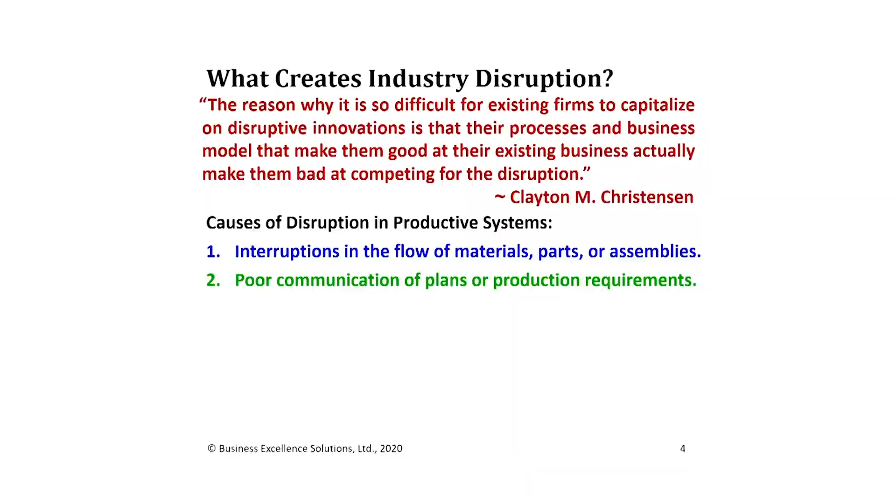So what are the causes of disruption in productive systems that we're looking at today? Well, first we have interruptions in the flow of materials, parts, or assemblies. And I'm sure you've all experienced those types of things. Next, we have poor communications of plans or production requirements. And I think also you probably have experienced that when you don't exactly know what the customer wants, or you don't exactly know what the materials are that you're processing. And then we start seeing there are issues in the production machinery or the system software, and it's not operating the way we think it should or giving us the results that we need to get. Then there might be shifts in customer demands or economic conditions that will have some external effect on us.

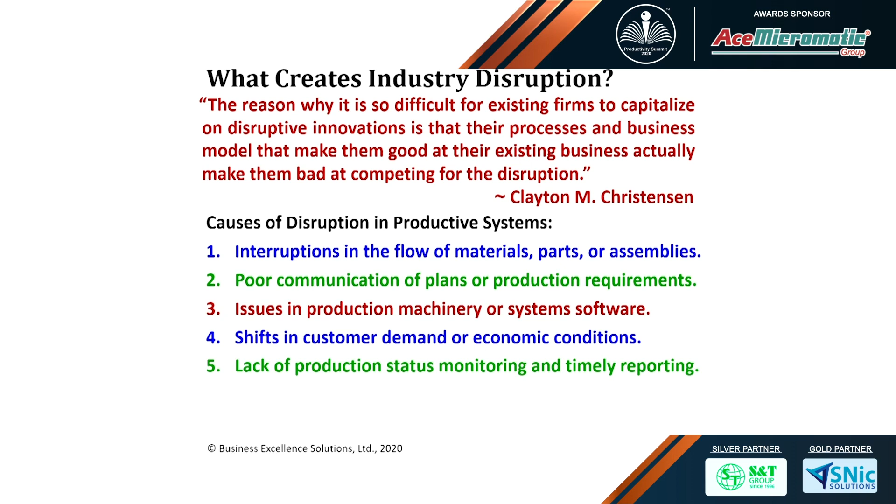Then the fifth is production status monitoring and timely reporting. We don't have it. We don't really know what's going on in the production system because we don't have that up-to-date inventory of what's happening. So we don't see the data flows. Another is there's an ineffective adaptation of the new technologies or systems. We know what we'd like to do, but we don't know how to actually implement it because we don't have the experience in using those tools, methods, or systems. And finally, there are some natural environmental occurrences or acts of nature that can create change in our systems. I live in Finland and we always worry about snow in the coming months. I know you don't worry about that in India, but maybe you worry about the cyclones.

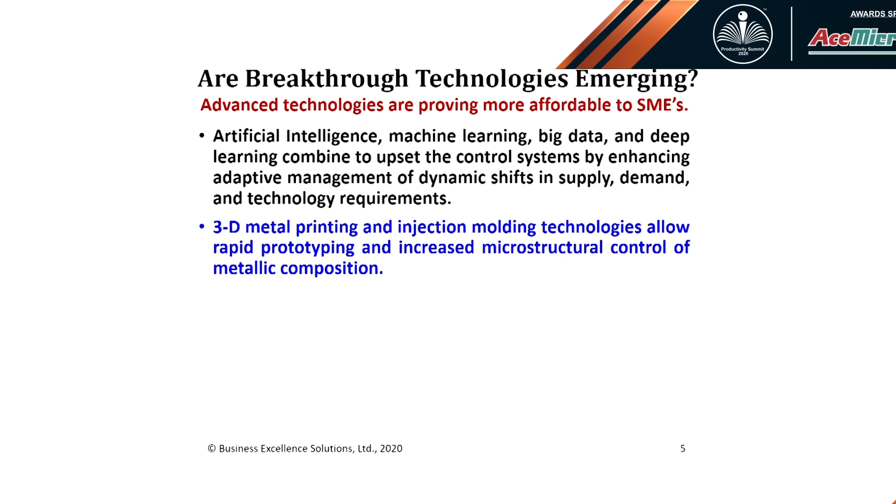So are breakthrough technologies emerging? So we see that there's some advanced technologies that are proving more affordable to SMEs. Now, we see artificial intelligence, machine learning, big data, deep learning. These combine to create control systems by enhancing adaptive management of dynamic shifts in supply, demand, and technology requirements. We see 3D metal printing and injection molding technologies allow rapid prototyping and increased microstructural control of metallic compositions.

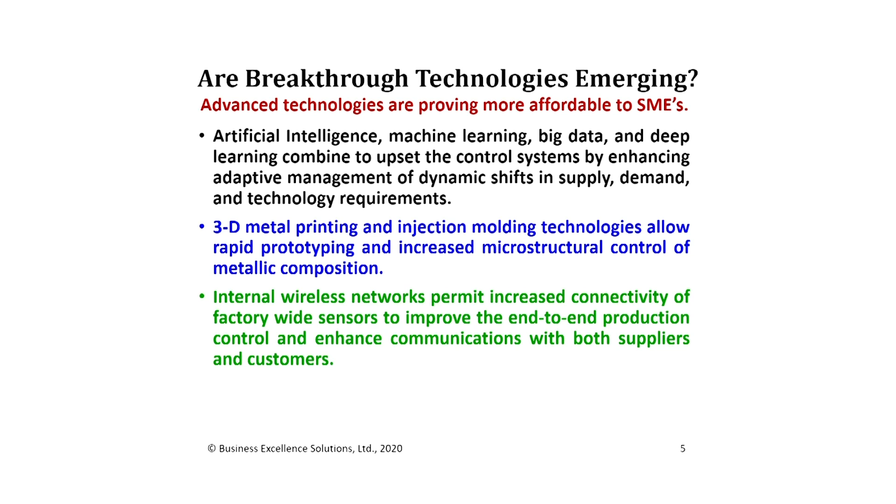We see internal wireless networks permitting increased technical connectivity and communication technology around factory-wide sensor systems to improve end-to-end production control and enhance communications with both suppliers and with customers. And then finally, we see digital sensors are becoming more accurate, inexpensive, and readily integrated into current production equipment. In the case studies that you'll see today, you'll see many of these technologies actually being brought to the field in terms of applications within Indian SME industries. So, which breakthrough technologies apply?

What can be done to control information and streamline flows? Well, we can make investments in information communication technology, what we call ICT. And this is using internet-based search engines and recommendation systems to increase our understanding of customer needs. It's also increasing the bandwidth and processing power of the digital communication links, which enhances our computer response for automated ordering systems or for tracking products as they're out in the logistics supply chain.

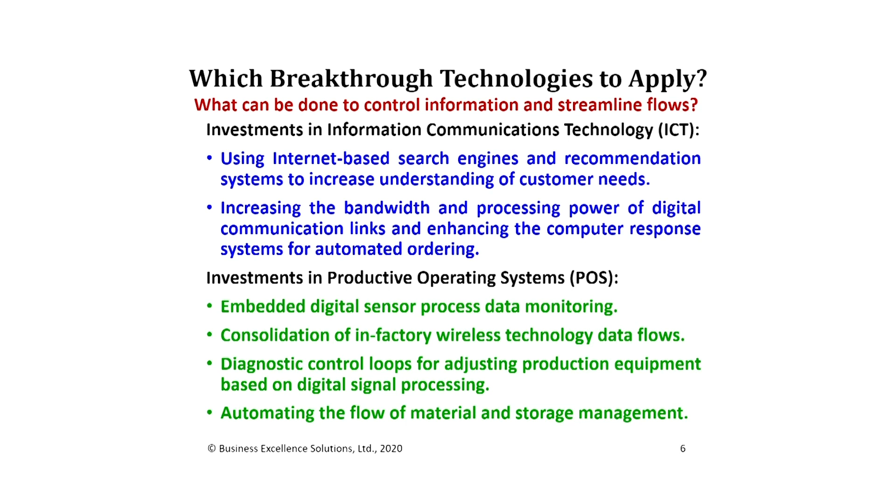We can also have investments in productive operating systems, POS. And so here we're talking about embedded sensors that are in process data monitoring. Or maybe we're consolidating factory wireless technology and data flows. Or we're doing diagnostic control loops to adjust production equipment based on digital signal processing. Or maybe we're automating the flow of material and storage management. So all of these are different things that are available to us to do today.

And we see technology paths for SME manufacturers. We should start small, think big, but begin with the end in mind. What is the design of the system we'd like to have? So begin by placing digital sensors to monitor production at critical control points.

So maybe we use RFID chips to determine location of critical components, or timestamps of barcodes to determine where items are as they advance through production, or motion detection to warn of unsafe situations, or vision systems that use pattern recognition to check on identification or completeness of work, or sensors that detect temperature, vibration, weight, etc. in terms of our items that are in the process of production.

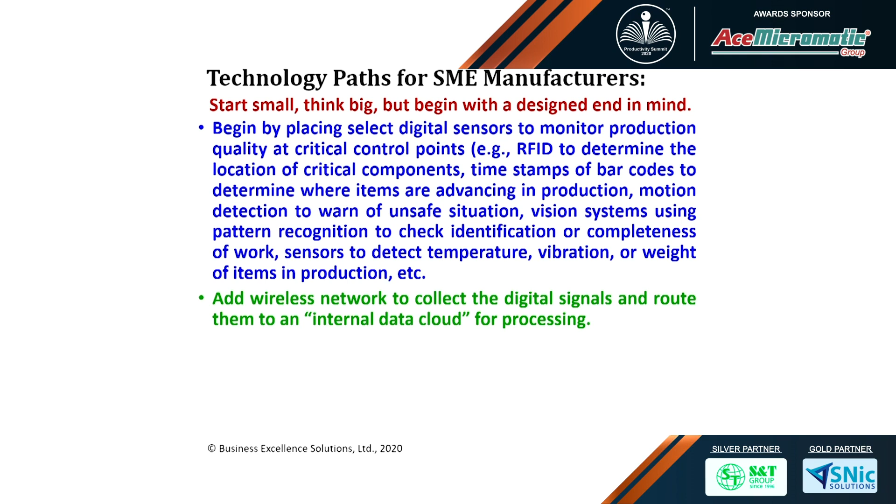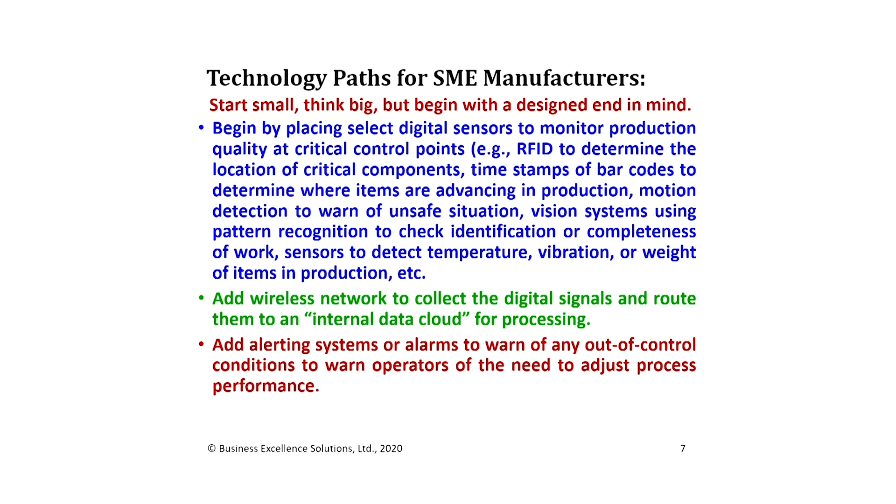We can add a wireless network to collect digital signals from around the production operations and route them to an internal data cloud for processing. We can add alerting systems or alarms that warn of out-of-control situations based on that data that's been collected, and tell the process operators that you have a situation that's out of control or that needs their attention.

Now, don't invest if you'll not be able to demonstrate the actual operational and financial benefits. I think this is a critical ingredient. Don't overinvest. Don't invest too early, because we don't have that much money in an SME to invest in these sorts of technologies.

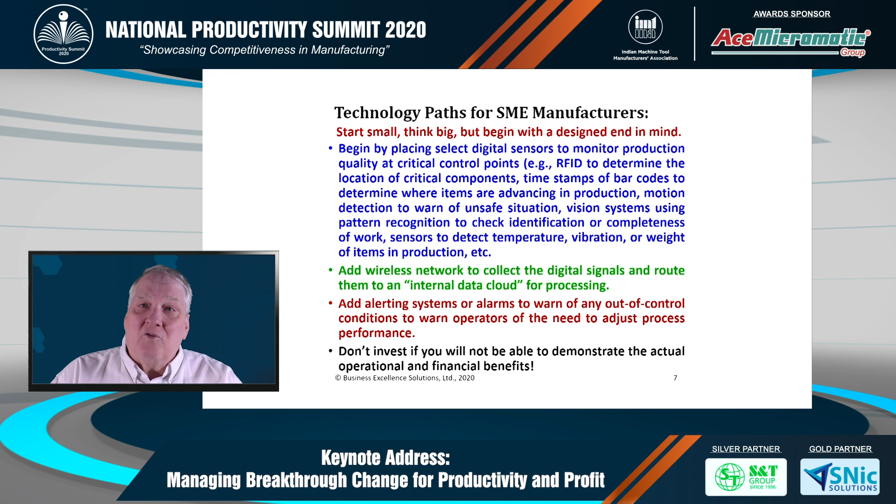Now, the good news is that we've gone through just this last pandemic, we have production now under control. Many times companies will find that they have excess production today. So investments do not need to be made in extending production capability. So we can use the money that we would normally use for production equipment in investing in the digital technologies to advance our control over those systems once we ramp up again after coming out of the COVID situation.

Now, I'd like to share with you a case study that illustrates how this can be done based on work that I did at Hewlett-Packard. And this was designing a lean technology system that had payback in less than 6 months. As a matter of fact, you'll see it was just 1 month. So the situation was we needed to perform injection molding of gears. And these were gears for very high, tight tolerance printing systems. And we needed to have 22 mold changes a day, 22 different molds.

And the current time at the start was 4 hours for a mold change, just a little bit less than that actually. And so we had a project team, one industrial engineer, that was myself. I had 2 recent graduates of engineering programs, a mechanical engineer and an electrical engineer. And then we also had Sal, the molding shop line leader. And we implemented this in less than 3 months.

And so we see the resource requirements. What does it take? Well, we were given an electronically automated controlled molding machine. It was just new at that point in time, a Nissei machine, and a budget of less than $100,000. And this was basically happening back in the 1985, 1986 timeframe. And the technologies applied, we had a blended approach.

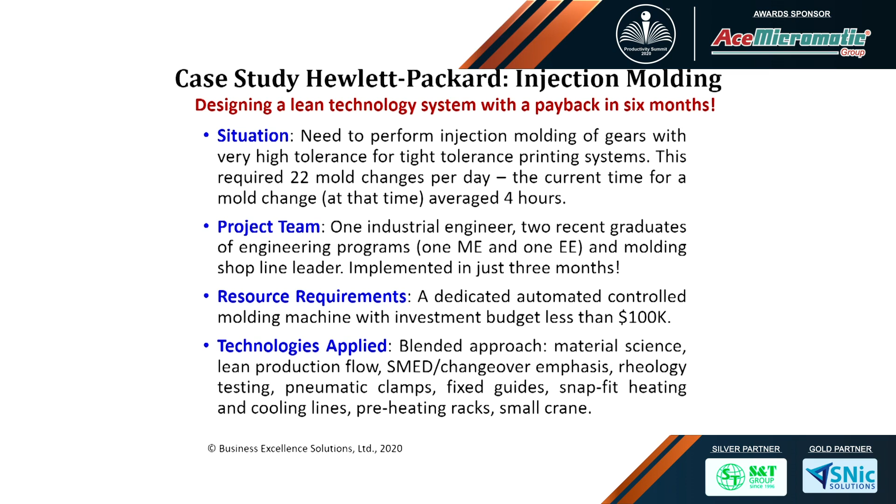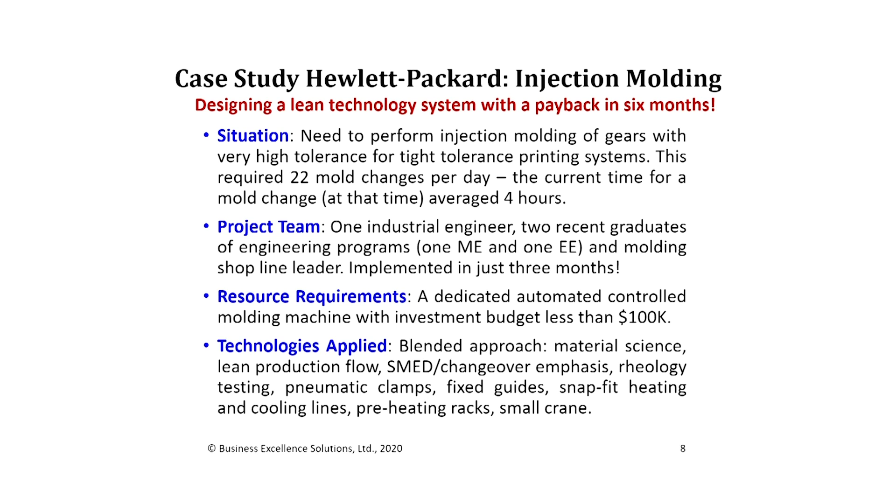So if you take a look at where do you start with lean, one of my senseis in Japan, Koichi Kimura, who's the head of the Factory Management Institute, he says start with setup time reduction. Don't start with 5S, don't start with anything. Setup time reduction, because that gets rid of waste in the flows. It allows the flows to move without having waiting time. It frees up productivity time.

So we took a blended approach. We were using material science in terms of how we were moving these parts. Previously, these parts were not injection molded. They were all made out of aluminum.

And so we were changing them to a polycarbonate with fiberglass and carbon filling. And so we were going to have an engineered plastic. We also had lean production flow. How do we make sure we get the flow of the materials, the parts, to the production line? Our rule was going to be mold today what we use tomorrow, so it would be dimensionally stable.

We used single minute exchange of die and changeover thinking to reduce the setup times. We had to test the rheology, or the shrink rate of the plastic, to make sure we understood what the shrink rate would be after it came out of the hot mold. We used pneumatic clamps to hold the molds in the molding machine. We had fixed guides that were put on the machine and on the tools so that they would just slide in place. We had snap fit heating and cooling lines so they would just snap on.

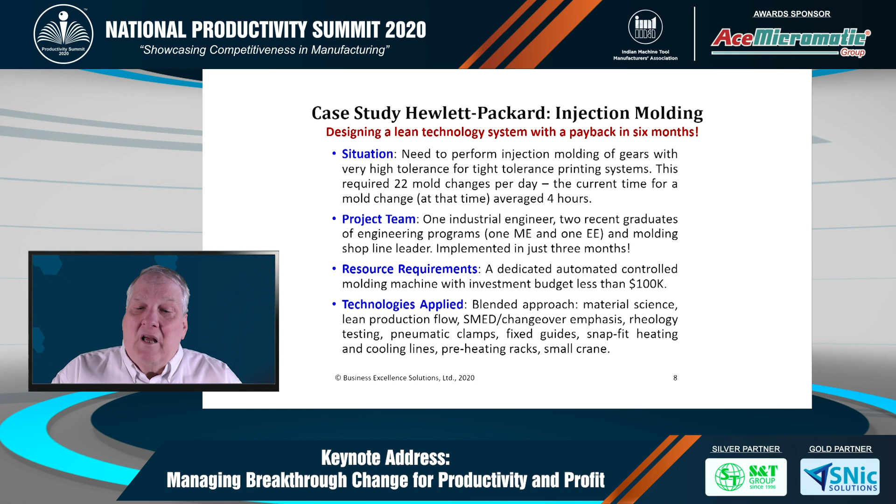And then we had preheating racks to make sure that we put a hot mold into the machine and didn't heat it inside the machine. And we had a small positioning crane to move the molds from the hot rack into the machine. So what was the cost benefit of this system?

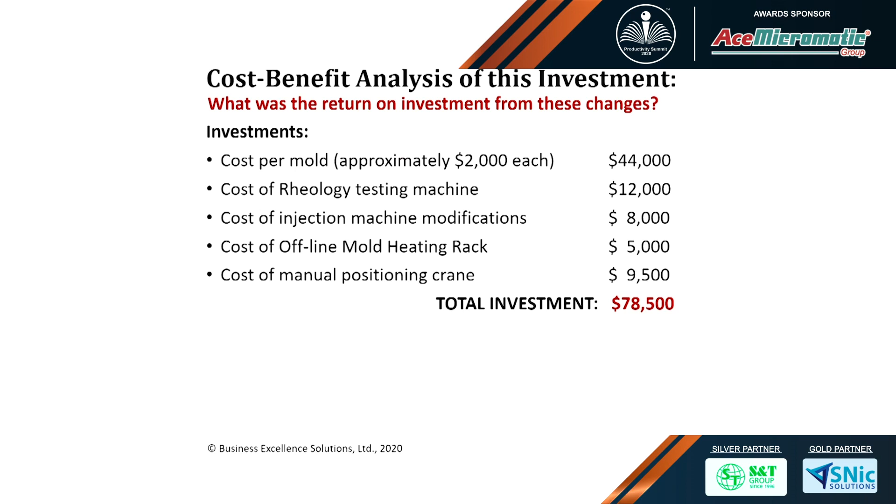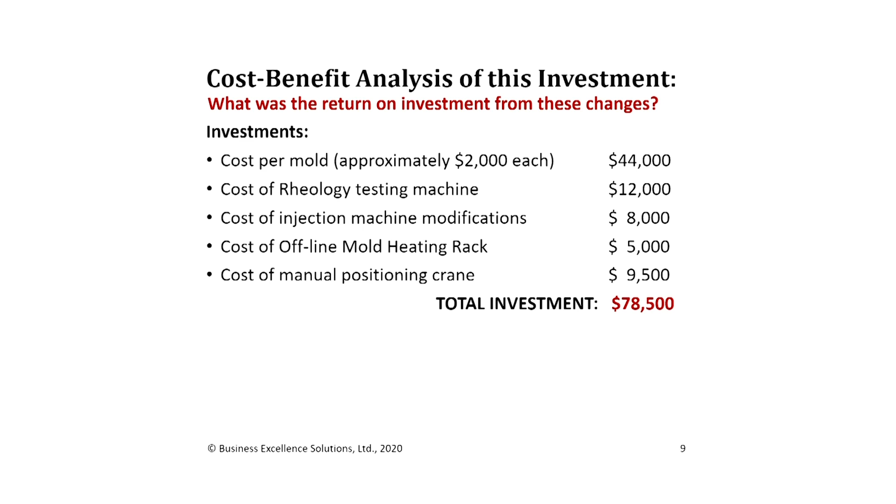So the investments, it was about $2,000 per mold, and so it's $44,000. The rheology testing equipment for the lab was $12,000. The injection molding machine modifications for the one machine was $8,000. The offline molding rack was $5,000 for the heating systems, and then the offline manual positioning crane was $9,500. So that's basically less than $80,000 at that time. Now, those prices are actually less today.

And the benefits, reduction in part cost was about 6 cents a part. Now we're talking about 22 different parts going in there, and we had 10,000 of those in the first month of production. So we're talking 13,000 from part cost reduction. We also had a reduction in setup time, and we were charging at that time $50 an hour for productive time, and that's $80,000. So basically in less than 4 weeks, we got the payback for that machine.

So here's the question. Where do we have hidden capabilities in your factories to do similar sorts of things? And I'm convinced if I look in an SME shop that I can find exactly those sorts of situations. Where can we take just a small amount of money with the right type of equipment and then make it much more productive?

So we have also lessons learned from enterprise resource planning programs that have been put into different companies. So many SMEs have put these in to understand how do we manage our material flows and synchronize them with the order flows. So first, what we have to do is map our process. Don't buy the equipment, understand your process. Know the measures and how you determine and analyze that data and what reports are necessary. So specify the master data items before you begin the software project.

What data will you keep in the software? How will it be structured? Where will you store it? How frequently will you sample it? And then assign some operational experts to audit that software process model and validate it against the real world. So when you put a model in the system, how it's going to flow, how you measure it, you have to check to make sure you go to the gemba, as they say in Japan, genchi genbutsu. Understand that process is actually the one that you're doing.

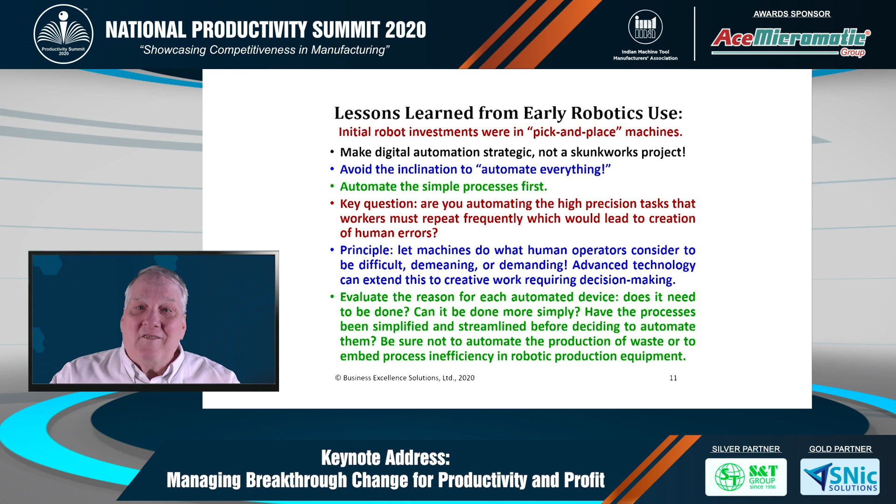So evaluate the reason of why you are automating each device. Does it need to be done? Can it be done more simply? Have the processes been simplified and streamlined before deciding to automate them? Be sure not to automate the production of waste or to embed process inefficiency in robotic equipment productions.

Now, the critique of digitization efforts of SMEs. We see that in looking at these in the past, there have been some classic mistakes made by SMEs in technology acquisition. So the first is failure to design the productive system so it fits your operational requirements. Do you really need that robot and its capability? Is it actually giving you a benefit that you can say, we are now operating in a way that is more productive than what we were doing before?

The second one is there's a lack of internal engineering support, which leads to design and production outsourcing the automated assembly. So we give it to another company and say, please design it for us. And I've seen this as being a classical problem. One company went bankrupt because they did this.

Another company was not able to actually see the productivity gains they had because the company they gave the design to was more interested in maximizing their engineering value and maximizing their costs and putting really cool technology in that the company didn't need. And so it actually never received the productivity level that it needed to have out of that system. And when they came back to buy more productivity, they had to buy the same system because they were painted into a corner because of regulatory demands imposed by the Food and Drug Administration. So they couldn't even upgrade and streamline the system and make it more inexpensive.

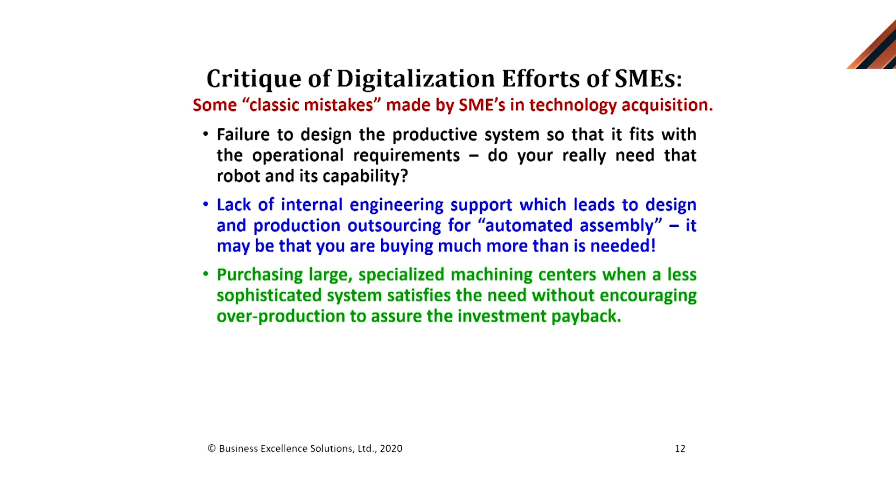Now, purchasing a large specialized machining center, we should not do those, but we should have a less sophisticated system that satisfies the need without encouraging overproduction so we get the investment payback. So it's critical that we don't put too much money into one piece of equipment. If you take a look at Toyota, we don't see big machining centers there. What we see is dedicated pieces of equipment at the spot doing a particular task. Less expensive equipment, not more expensive equipment. And then we let the machine do what it needs to do and the human have their part supporting that machine.

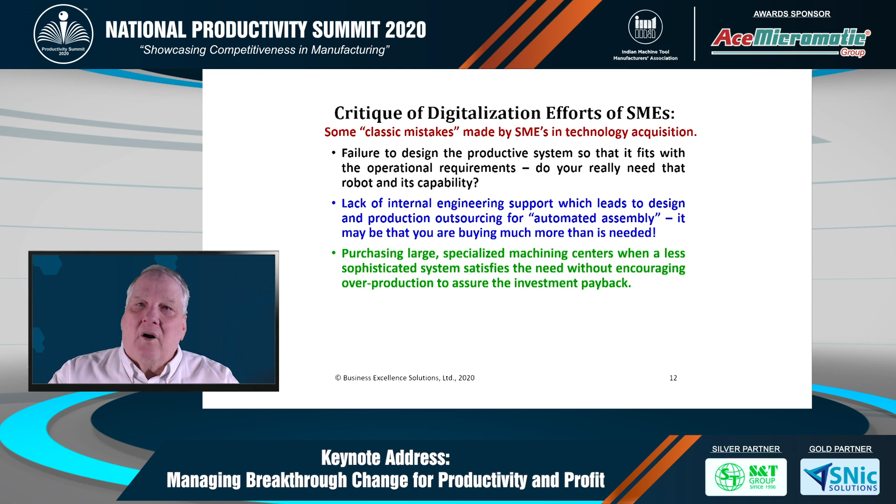Incorporating advanced technology to assure managerial bragging rights is another problem. Or to say we have a marketing position, we're high tech in our industry, or we're first with this technology. So those systems, if they don't add value, that's empty marketing. It's just saying we have now some hot words we're going to talk about. We want to give this marketing pizzazz to our company. But that doesn't help us in the productive world. So we need to make sure that we're actually getting value addition out of those production investments.

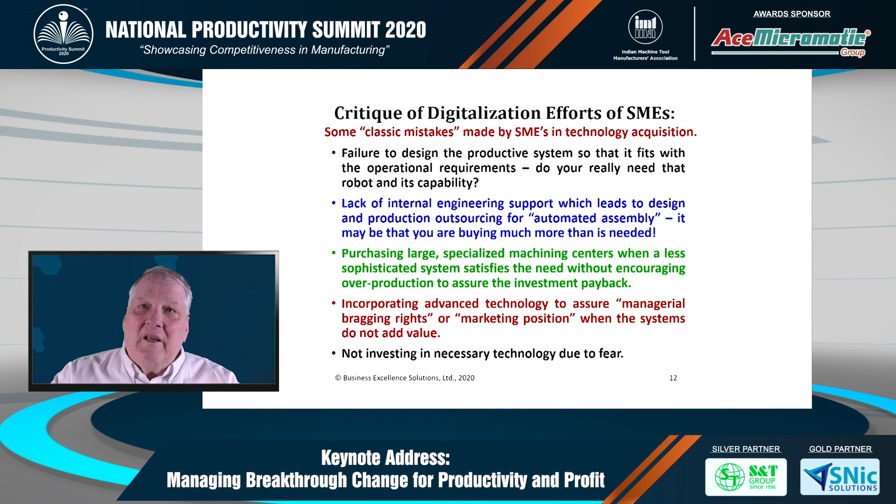And perhaps the last one is not investing in necessary technology due to fear. And this is where we say, I don't really know what to do with this and I'm afraid to do this, so I'm going to do nothing. Doing nothing is a choice. And when we make that choice, what happens is we can fall behind. So the best situation is really know your situation, understand what it takes to drive forward, and then invest slowly and surely in what you need to do to drive forward.

So I want to give you a checklist, if you will, for adopting new technologies. So carefully ration your investments so they support your needs. So know your production process. Keep the application of automation targeted on simplicity of design.

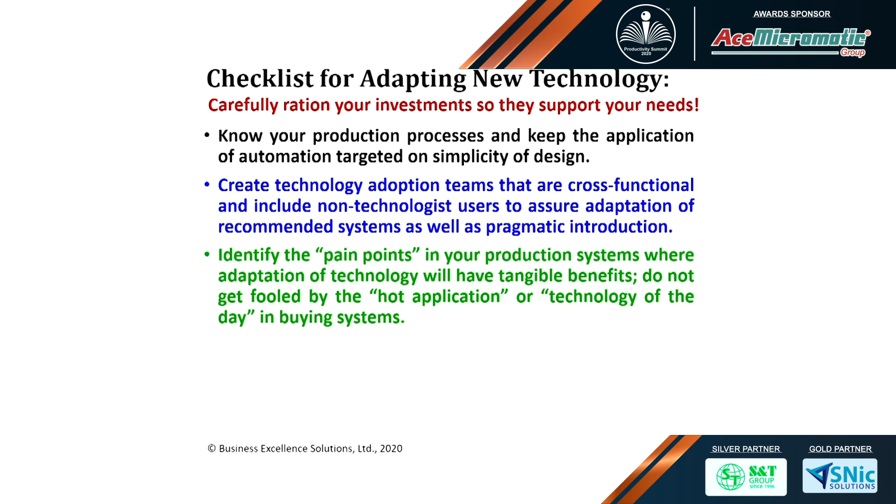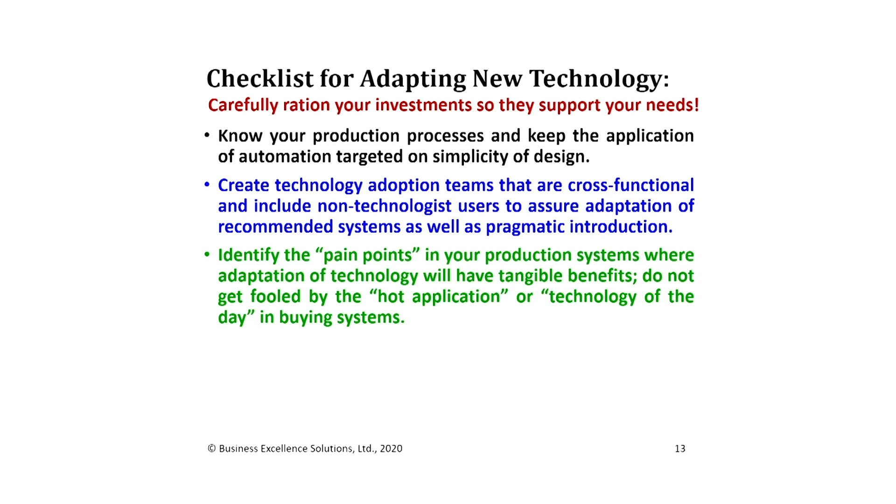Create a technology adoption team that is cross-functional, that includes non-technologists as users, to assure adoption of recommended systems and pragmatic introduction of these capabilities. Identify where you have pain points in your production process, where adoption of technology will give you those tangible benefits. And don't get fooled by the hot application somebody's trying to sell you or the technology of the day when you're going out to buy a system. Take the time to really investigate and make sure that it is right for your application process in production.

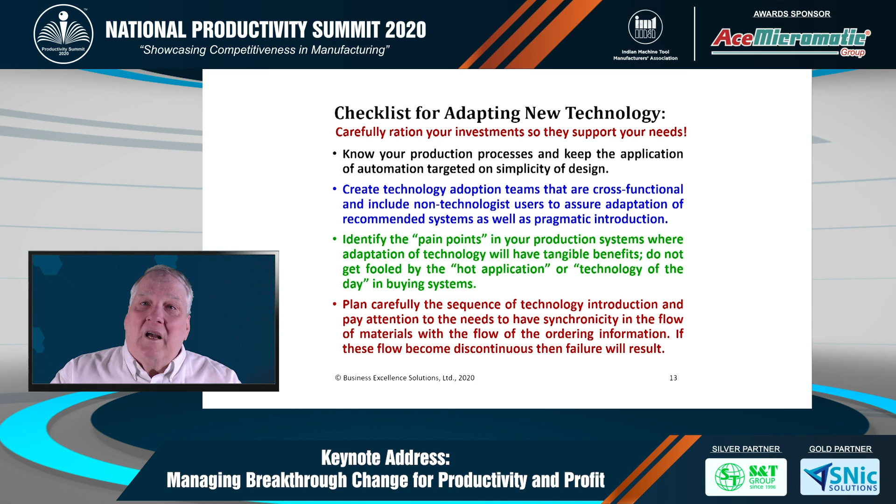And then finally, plan carefully the sequence of technology introductions and pay attention to the need to have synchronicity in the flow of materials with the flow of the ordering information system. Don't let one get out of sync with the other, because at the end of the day, you have to blend in your final system the flow of the orders, the flow of the material, and the pace of production or the cadence of your production. If those flows become discontinuous, then you'll have failure in your production system and you will not optimize the output.

So I have a couple of takeaway points that I'd like to share with you today. So when we think about this, there are some things that are important in terms of a small business. First of all, you don't have much money to invest. That's clear. Even large companies are very careful about how they make their investments in digitization. And we can't make too many failures in these types of things because there's just not any extra money available to cover up for those mistakes.

A second issue is that we have to make sure that we get the quality right in those parts. So what we should see at the end of this investment is not just higher productivity, but we should see higher quality results in terms of what we're doing. Less defects, less rework, more on-time delivery to the customers.

And so when we start looking at disruptive technology, we have to remember, it is coming to your industry. No matter what your industry is, it is coming. It's probably already there. You may have some leading competitors, or maybe it's a major corporation in India that's already doing this in their internal shop. So either you can be a leader and gain advantage, or you can be a follower and lose advantage. So do not spend time resisting that technology. Carefully make the plan, move it step by step, and be sure that you make each step with confidence.